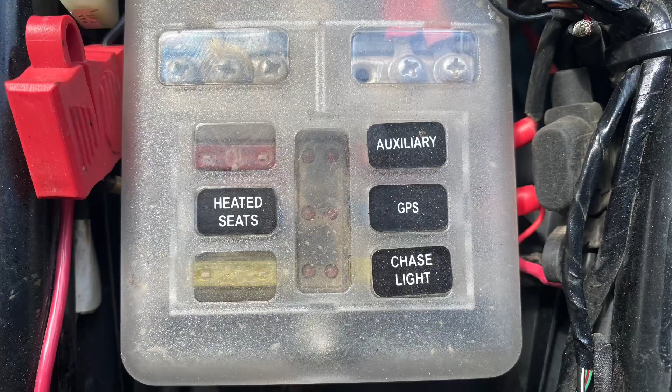Now that we've peeled away the tank cover, let's go over what we need. We need lights, which are my Handster LED lights, the light mounting assembly, and the Givi brackets that mount them underneath the fender. We also need an on-off switch, and I run all of this off the junction box. Don't forget, we'll need extra wire and wire loom to keep it pretty.

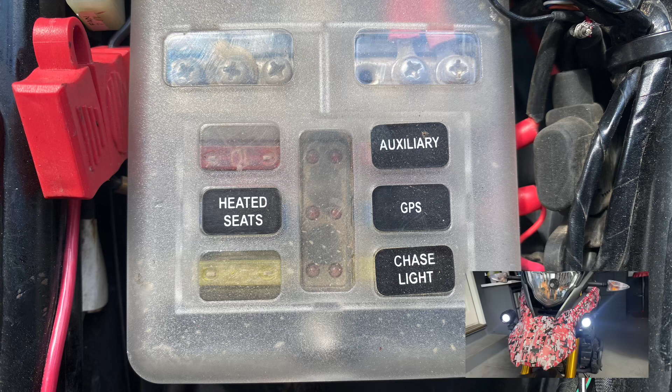I use a junction box for all of my auxiliary equipment. This eliminates me tapping into the main wiring harness and gives simple diagnostics for any of my auxiliary equipment. I run my auxiliary lights, navigation system, an auxiliary plug, and my heated seats plug off of this junction box. It's a simple connection from the main battery with a positive cable and a negative cable.

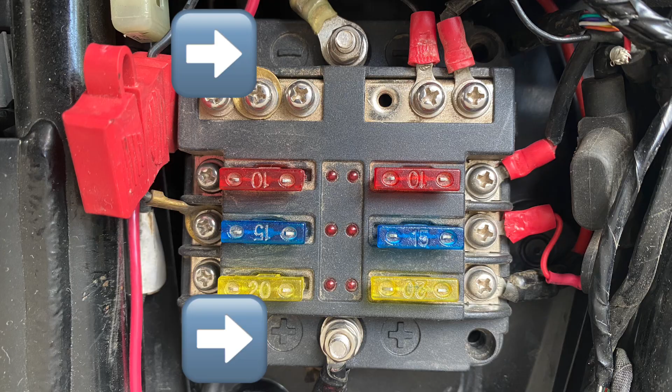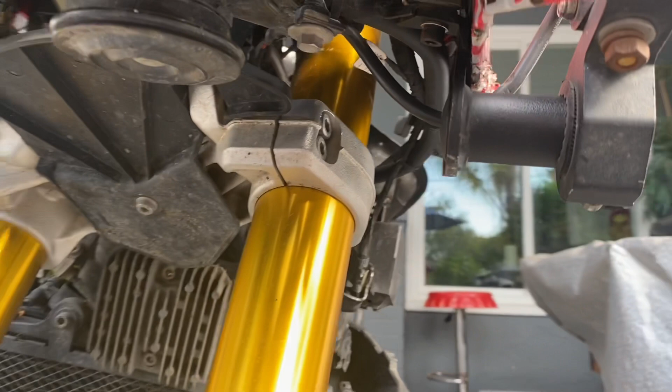Mounting the LED Handster auxiliary lights to the mounting brackets, and the mounting brackets to the Givi mounts, is pretty self-explanatory. One change I made was Givi supplies you with a 4mm Allen, and I upgraded it to a 5mm Allen to eliminate having one extra Allen key on the bike.

Now that our mounting brackets are installed and our lights are in place, we need to install the handlebar switch in a convenient location on the left side of the handlebar.

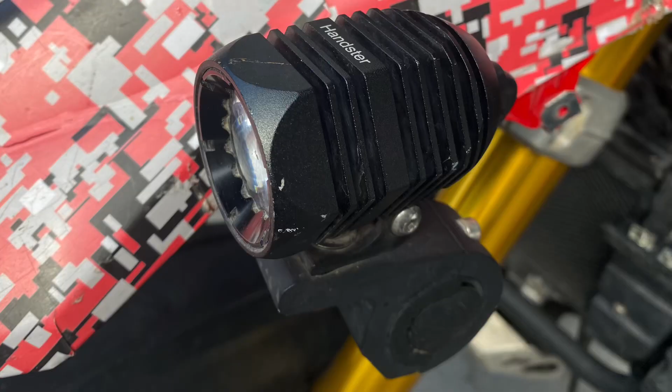With the junction box installed, the lights in place, and the switch in place, we know how much wire lead we have from each of these components and what it will take to wire it from those components back to the junction box. The switch I purchased came with a great wiring diagram and already had an inline fuse and relay, so it was a pretty easy hookup. Let's go over the details.

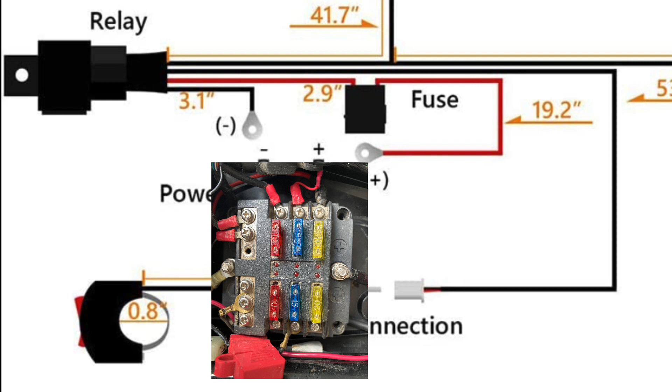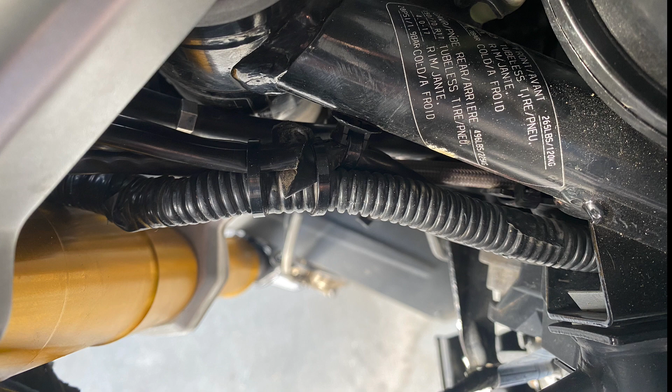We've installed a junction box, so our positive and negative will start there. The positive and negative cables run to the supplied relay, which I mounted under the left side cover of my motorcycle. Then I extended the leads from the relay to the on-off switch and to the LED lights themselves. Finally, we beautify this with some wire loom. And boom, we got auxiliary lights.

Not necessary, but I took the extra step of adding a rocker switch to my junction box so I can cut it on and off at will.

Now that we have our auxiliary lights all wired up and installed, go back to the how-to video if you need to for reassembly. Get your G310GS back in operating order, and stay tuned for next week's MotoVagabond how-to.